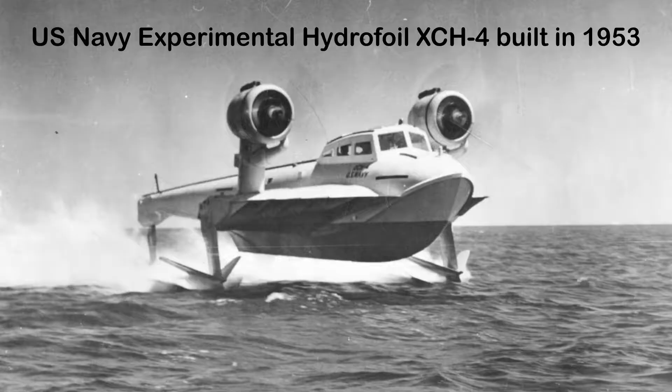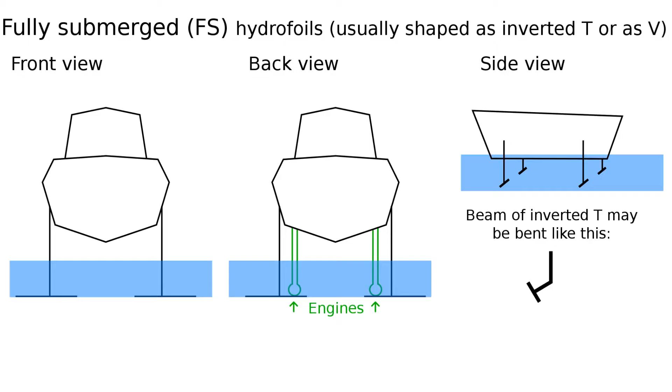So there's a couple basic designs. There's surface piercing foils, which are wings that come out of the water, such as in this picture, and there are fully submerged ones where the whole wing is underwater. Now, the ones that come out of the surface are easier to control, but the ones that are fully underwater are more efficient.

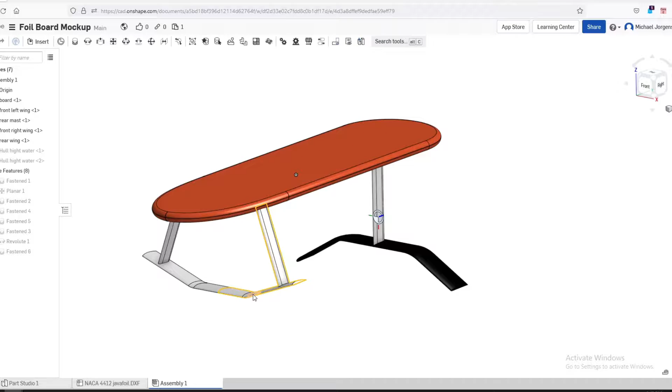With that little introduction, I want to bring you guys into the concept design that I have, and you can see here in my Onshape studio, the CAD software, that the design I've gone for is a surface piercing foil in the front and then a fully submerged foil in the rear. Now, the design, of course, is just something that came out of my head and will most likely change before the final version is completed. But here, this kind of gives you the basic tripod shape that I'm going for.

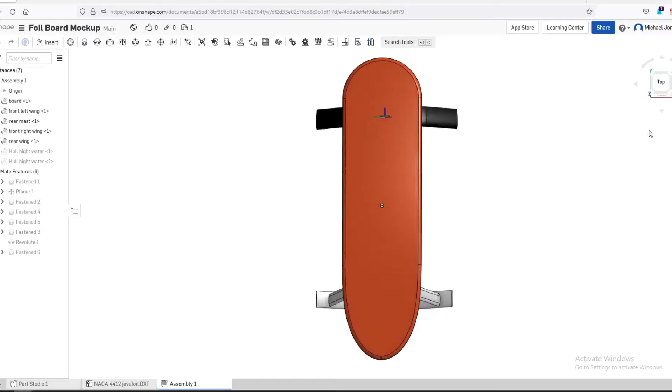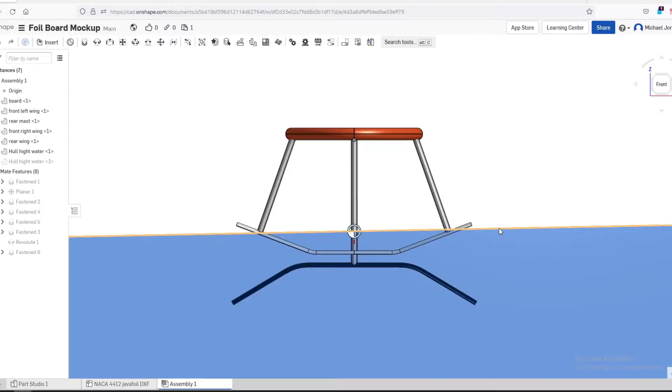Now you can see we take a front profile view here, and this is a mock water line. And so this shows where it's going to be sitting with the board in the water stationary. And then we switch over to one that shows the flying height. So while it's moving, this is what's going to be submerged in the water. So the board will be sticking up about 2 feet out of the surface, and the wings are going to be supporting the weight, as you've seen in some of the historical photos.

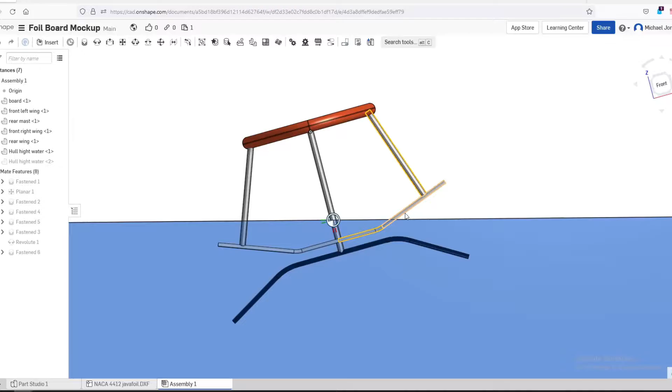So you can see here, if we rotate the horizon in the model, this is the perspective of the board turning. So it'll have some roll aspect. And you can see here why the front wing would stabilize in roll. So now the inside that is lower has more wing in the water and will tend to push the craft back to center and make it level. And the fact that the other side of the wing is out of the water will make this effect stronger.

So looking now at an isometric view, this is kind of the YouTube thumbnail thing. It does look pretty sweet from this direction, and again, you can see the tripod. The 3 points of contact will ensure that the board is stable in level flight.

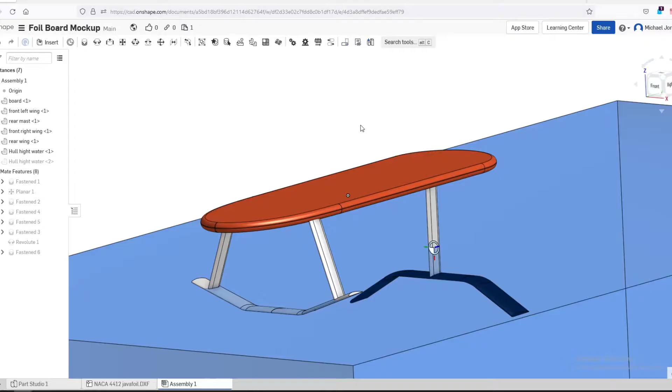Okay, so for the sanity check portion of this video, the first thing we have to do is define our requirements, and that will be the carry weight, estimate the weight of the board, the speed we want this thing to go, and stuff like that.

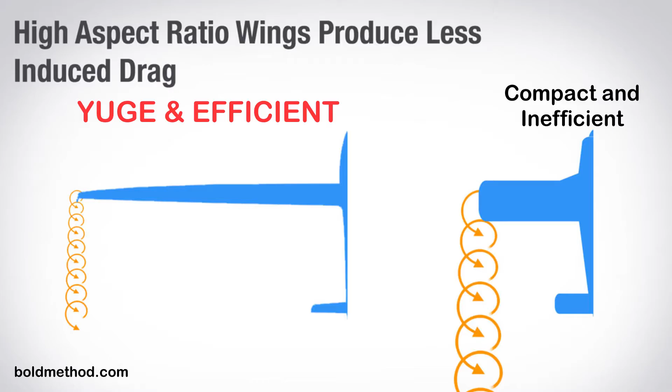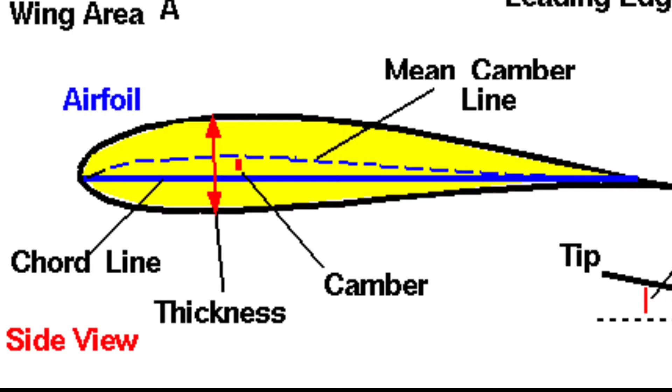So in this case, here are the specs that I will be shooting for. Now, one of the most important things is the aspect ratio of the wing, because that determines how efficient your craft is going to be for any given wing size. So you start out with this airfoil shape that's a 2D side view, and you assume that it's infinitely wide. But when you move to an actual shape that has ends on it, so this rectangular wing, your aspect ratio comes into play and the actual performance goes down quite a bit.

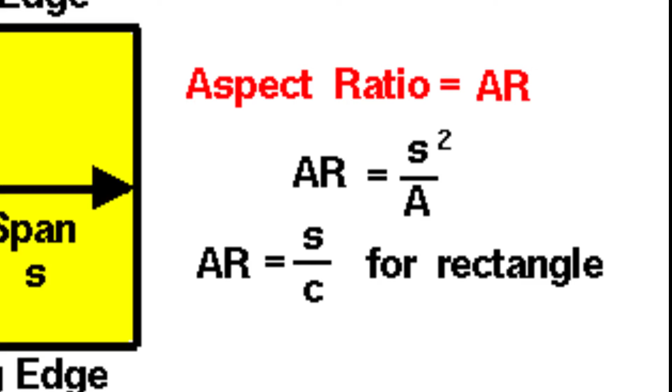So in this case, if we take a brief look at my calculations, my desired span for the rear was 1.5 meters and the front was 1.2. And so I've tried to increase the aspect ratio as much as possible and got to a number around 6 2/3 for the front and 6.8 in the rear.

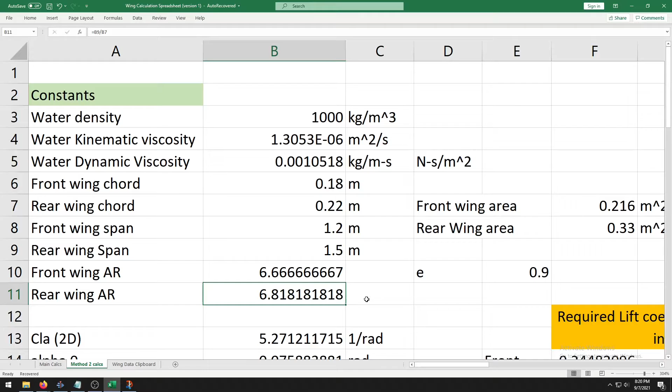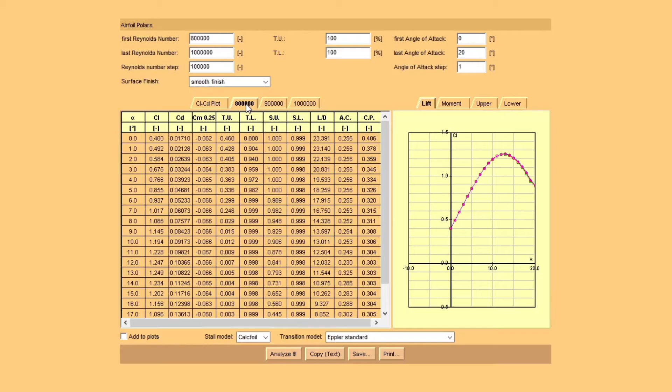I plugged these numbers into a tool that I've been using called Javafoil after I decided to use a NACA 4412 airfoil for many different reasons. And got some fundamental constants that I needed to calculate the required coefficients of lift and angles of attack, as well as the corresponding drag coefficients. So with all these numbers, I'm able to tell at the end of the day what angle the wing needs to be at what speed to make sure this thing flies.

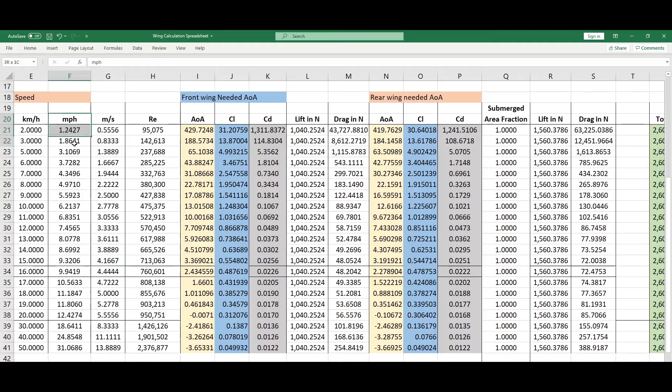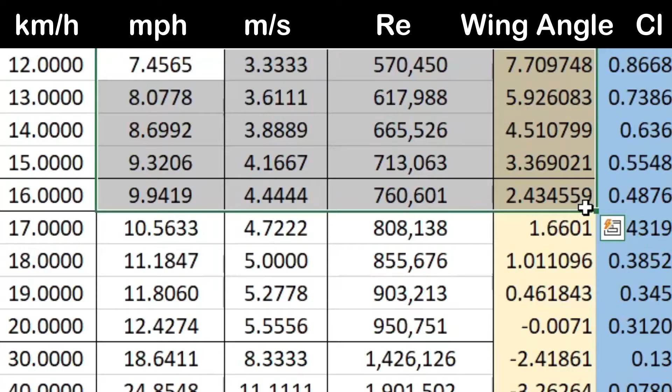Judging by the numbers, it seems that I'm quite in the realm of an acceptable wing area. And the reason I know that is because the angles of attack required to lift the 200 kilogram carry weight out of the water are quite reasonable, on the order of single digits, 3, 4, 5, 6, 7, 8 on the front, and about 5 or 6 on the rear, approximately 6 to 8 miles an hour, depending on the parameters that I put in.

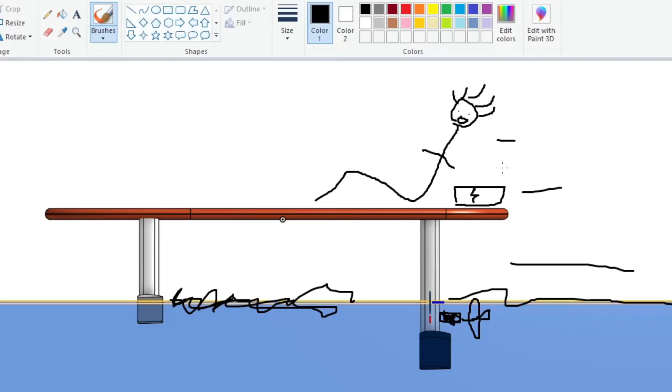The rear wing being submerged has a much higher efficiency than the front because it's not coming out of the water, and therefore we can generate more lift for the same drag off the rear wing. So it makes sense to put more of the load in that area. As well as that, the driver or the pilot will likely want to be sitting towards the rear of the craft during operation. And it also helps with the flexibility of battery placement.